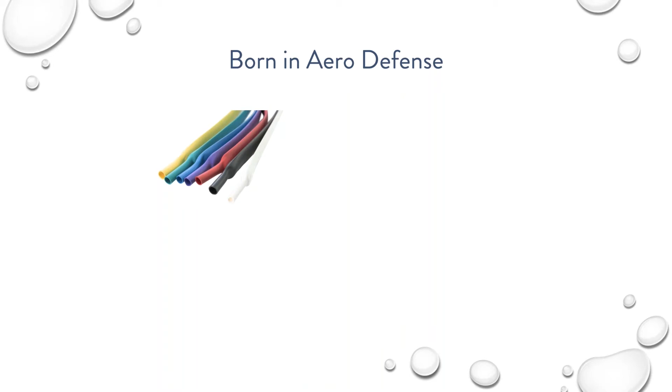We kind of started in the world of aero defense, and we like to say we were born in the world of aero defense, which really means heat shrink. We came into heat shrink, and we still do a lot of it. We've worked with companies including Bell Helicopter, Boeing, Lockheed Martin, and we still continue to work with these companies. We still work a lot in the heat shrink market, and it's been a very successful venture for us.

But in recent years, even though we started in the heat shrink world, we've actually become known as the cold shrink guys, and that's not a title we're offended by. We actually really enjoy it. It's kind of a funny story of how we got there, but ever since becoming more known as the cold shrink guys, we ventured into other weatherproofing products.

You can see a number of our most popular products here. Our whole goal with our weatherproofing product line is to produce weatherproofing products that save you time and money. What we want to talk about today is, I know weatherproofing is a major issue for anyone who works in telecom, WISP markets, etc. Anyone dealing with RF out in the elements, weatherproofing is a big problem.

The thing we really want to hit on today, because we work with the large carriers and provide a lot of weatherproofing for them, is to help you understand what their mindset is about weatherproofing, how they approach it and why, and how that's informed some of our product line. This requires telling a part of our history.

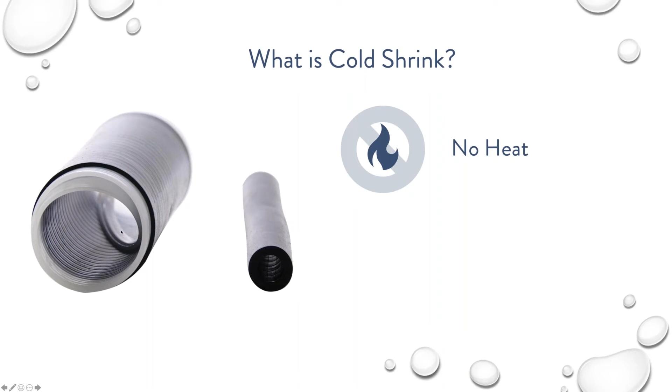If you're not familiar with cold shrink, literally it shrinks from one larger size to a much smaller size, as you can see here. Cold shrink is a really great product - it requires no heat to shrink. You just remove this inner plastic perforated tubing, pull this ripcord, and the perforation quickly removes, requiring no heat to shrink.

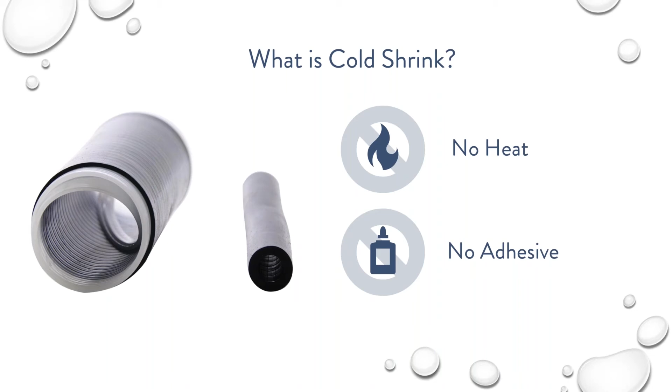It also has no adhesive, which can be highly advantageous for a number of reasons when it comes to weatherproofing. Cold shrink is a really awesome product, and AT&T liked the idea of cold shrink, but they weren't exactly happy with the version they had at the time, which was an EPDM model, and it just wasn't watertight enough for them. So they came to us and said, what can we do? We like the idea - what can happen here?

So we sat down and figured it out - it's a long story of how we got there, but essentially it came down to us figuring out how to make silicone cold shrink. This silicone cold shrink solved a lot of the problems that AT&T was having.

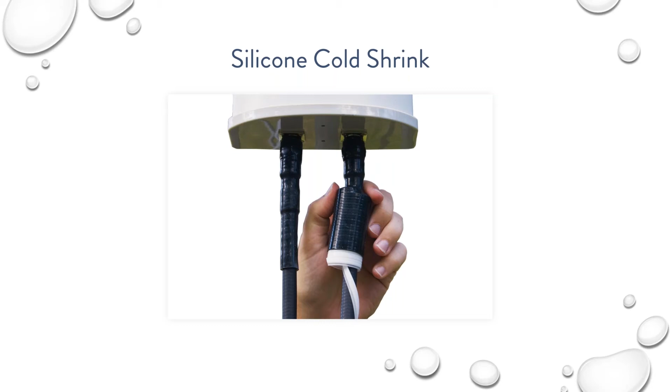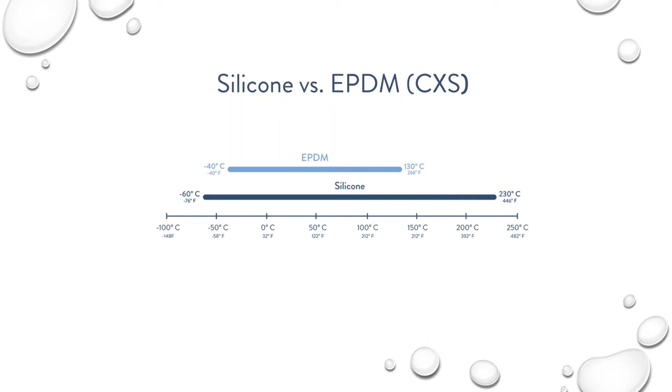Namely, if we compare silicone to EPDM cold shrink, one of the biggest differences between the two is EPDM cold shrink just doesn't have as large of a temperature range that it's resistant to. Whereas silicone cold shrink is pretty extreme in the temperatures it will withstand - you can see here, -60 Celsius or -76 Fahrenheit, up to 446 Fahrenheit or 230 Celsius. It's pretty remarkable what it can withstand temperature-wise.

However, the even larger reason that AT&T was very keen on this silicone cold shrink was because of the shrink ratio.

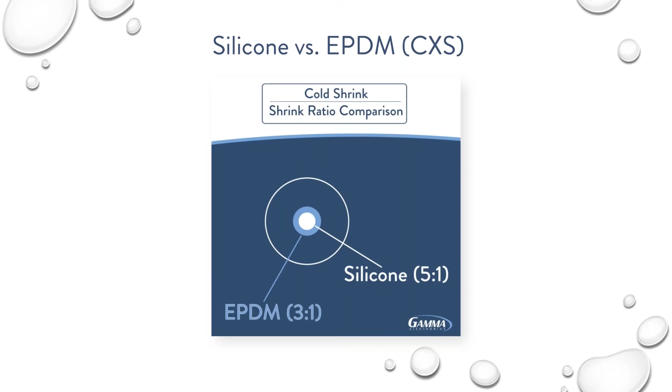This is a quick video that shows the difference between EPDM and silicone's shrink ratios. The EPDM is a 3-to-1, where the silicone can go up to 5-to-1. If this white circle is where both cold shrinks started, the EPDM only gets down to a certain size, whereas the silicone gets down to a much smaller size. Even though it may not seem like a large difference, when you're shrinking down to something the size of a cable, it makes a world of difference.

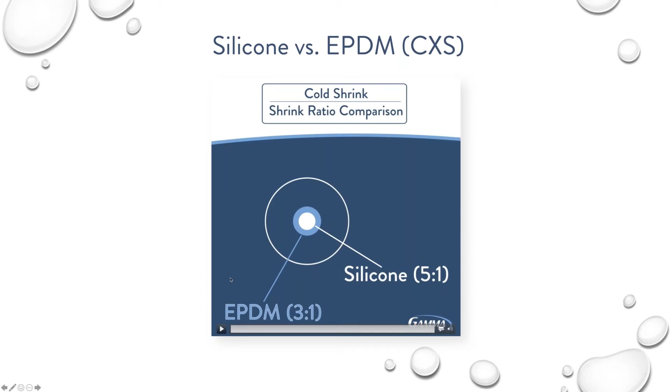That's the reason EPDM cold shrinks often come with a foam strip. They can't shrink quite small enough to get a tight wrap around a cable or connection, so they provide this foam strip to make up the difference. With silicone, you don't need that. It's going to get small enough that you won't have those problems. It'll be watertight on its own, removing an additional step that comes with EPDM. Plus, the foam strip just isn't going to be as resistant to water as a rubber material would be.

Silicone specifically is going to be incredibly resistant, more so than EPDM. Unfortunately, EPDM can still be a great product, but there are a lot of companies out there who sometimes make it seem like they're selling silicone when they're really selling EPDM. So one thing to know is that you want to be sure which one you're buying.

With our silicone, we put an S in the part number, S for silicone. On top of that, if you look for the more shiny, glossy version of cold shrink, you're usually getting silicone. With EPDM, it's going to have a flatter, matted look. That's a key way to tell the difference between the two, and it means the silicone is going to get that better shrink ratio and better temperature resistance, among other things.

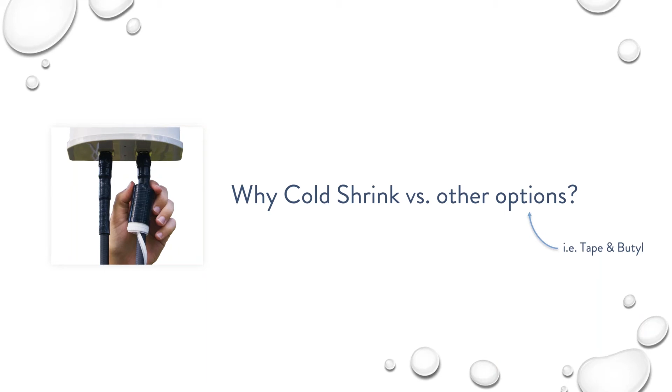And specifically, they were using a lot of tape and butyl at the time. So we asked why they wanted cold shrink versus tape and butyl, and we hypothesized the reasons. One of the top reasons we thought of was installation time. As you saw in the video, we're very proud of how quickly you can install cold shrink.

It's pretty amazing stuff. We started putting numbers together and realized this installs in seconds, less than a minute for sure. And they've got to love that.

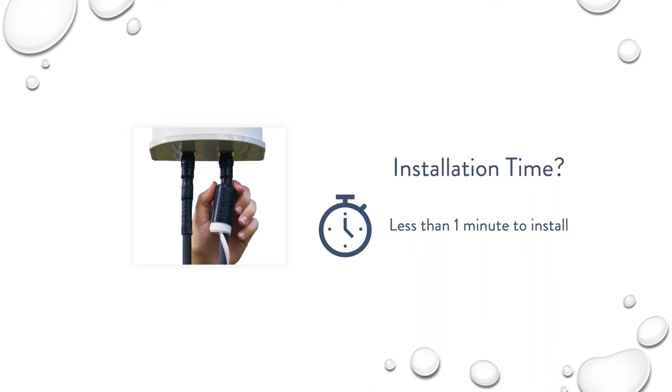We did the numbers and found that in typical telecom tower installations, when a brand new tower is going up, a lot of the time they're using 50, sometimes up to 70 cables, which means 100 connections. So if we do the math, if cold shrink took 1 minute, which it doesn't, but if it did, and you had to do 100 different connections, you're talking 100 minutes, or a little more than an hour and a half.

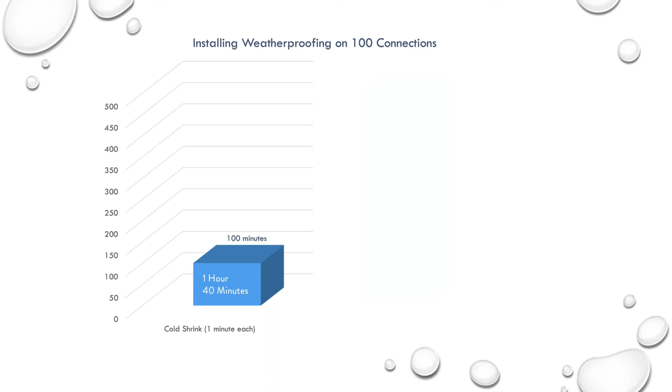Compare that to tape and butyl. At best, numerous installers have told us you're looking at 5 minutes, when it's at its best. That's a difference of 100 minutes to 500 minutes when you're looking at 100 different connections.

Especially if they can't get their fingers in around the spacing around those connections, there's so many issues with installing it. So you're talking the difference between an 8-hour day and at most a 2-hour day. And 2 hours is on the heavy side.

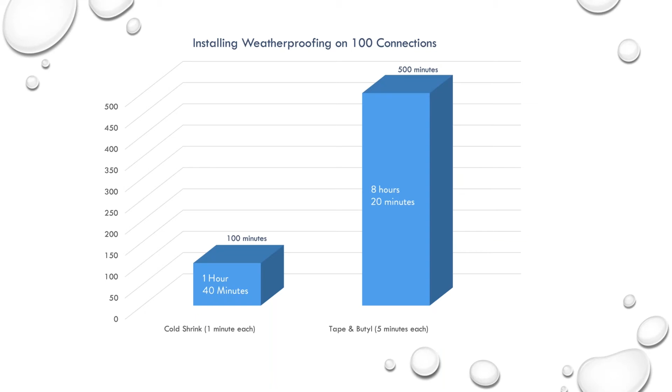If you look at the numbers in greater perspective, cold shrink at its worst, you're looking at an hour to an hour 40 minutes. Tape and butyl at its best is a full day's worth of work.

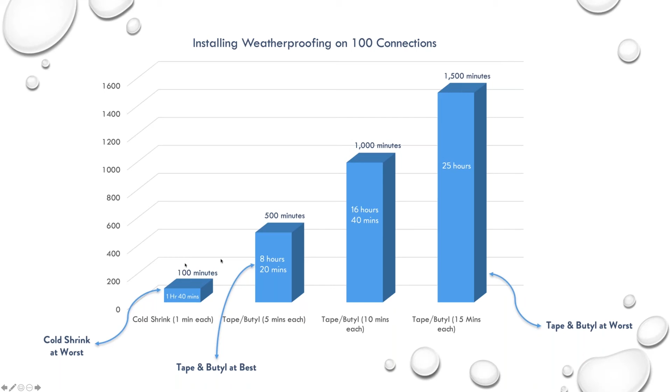If tape and butyl, which tends to take more around the 10-minute mark for most of the guys we've talked to, when we've tried it ourselves, it tends to take around 5 to 10 minutes in that range. But we've heard some guys say at its worst, in harsh environments, it can take up to 15 minutes, which means you're saving an immense amount of time by going to cold shrink. So literally days worth of work can be compacted down to a couple of hours by using cold shrink. We thought installation time's got to be the reason.

But again, that was not the primary reason AT&T chose cold shrink. That was not the reason they said mattered most to them.

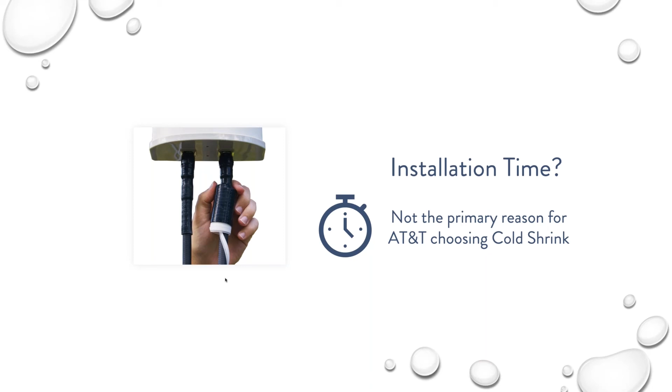So then we thought, as Lisa mentioned earlier, accessibility. We thought it must be the small amount of space you have between these connections, and tape and butyl isn't going to fit into those spaces very well. You can see less than an inch here. And as any of you who have installed know, getting up on a tower with those cables on those connections, wrapping tape and butyl around it, it's just a nightmare. So we thought accessibility must be one of the main reasons.

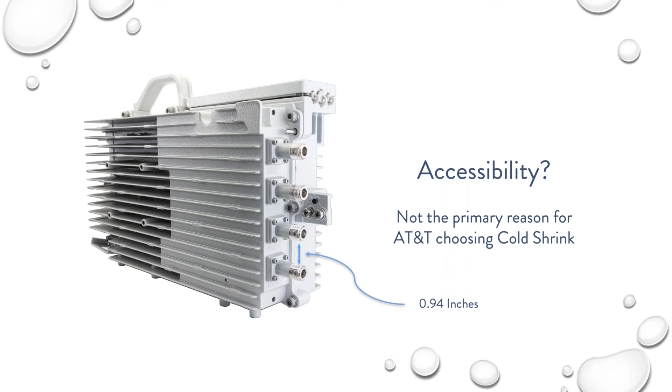No, again, not the primary reason they like cold shrink.

One thing they did tell us that we didn't think of right off the bat was installer quality control. By this, I mean you can have a brand new installer and a very experienced installer get essentially the same results with cold shrink. They told us that, and we thought, oh, that makes a lot of sense. But again, not the primary reason they chose cold shrink.

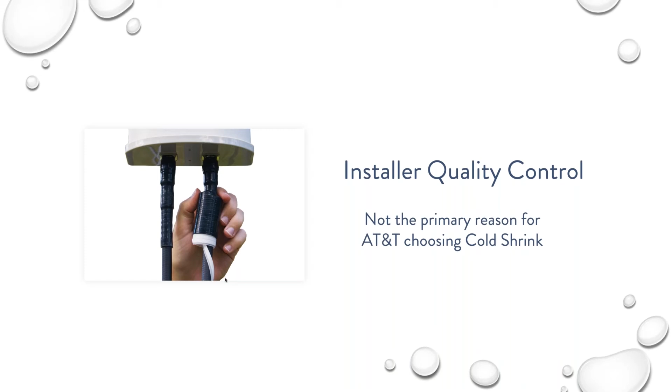So we essentially were thinking everything they must love about cold shrink is about the installation process. But really what it boiled down to for AT&T was maintenance. That's what they care about more than anything. And when we started wrapping our heads around that, it makes a ton of sense. Maintenance means time and money.

If you think about it, it makes a ton of sense that they can plan the costs of a tower. They can plan how much time it'll take to build, how much the materials will cost, all of it. But maintenance is much less predictable, and so they wanted to reduce those unknown costs. They want to bring that cost down and help their bottom line.

A study was done recently that said maintenance costs are approximately 49% of operational costs for major carriers deploying 4G. I mean, half of your operational costs can be devoted to your maintenance. And with that said, AT&T informed us one of the top reasons for maintenance costs is bad weatherproofing.

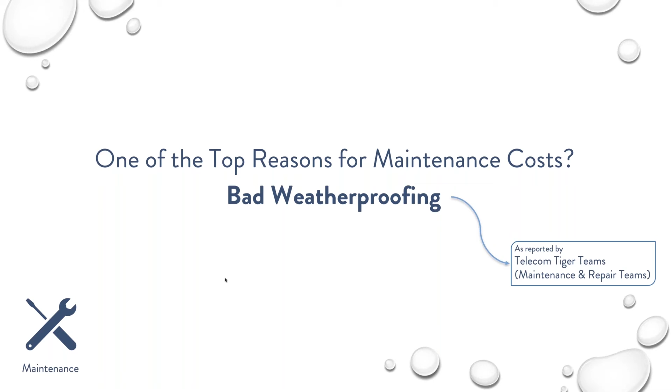Tiger teams have told us this too. Telecom Tiger teams are the teams sent out by telecom companies to do maintenance on the towers. They've all told us bad weatherproofing is one of, if not the main reason for maintenance costs. They estimated at least 30%, maybe as much as a third, of maintenance calls are due to weather-related issues. That brought up the question: what's wrong with the weatherproofing that's resulting in this much maintenance and maintenance costs?

It's an oversimplification, but either the weatherproofing just doesn't work or it doesn't last. We can go back to the original example of EPDM cold shrink. It kind of works in theory, but you have to use the foam strip. We've talked to guys who told us they actually zip tie the ends of it to make sure it gets a watertight seal. So you're using foam strips and/or zip ties, and it just doesn't provide the results you want because of the shrink ratio issues in particular. It's good in theory, but it doesn't produce the results.

And in regards to extreme temperatures, like in Canada, maintenance is what we hear twice a year, they have to go out and do weatherproofing. That's a good example. We recently spoke to an installer in Canada who said that twice a year he's having to swap out his tape and butyl. So it just doesn't work.

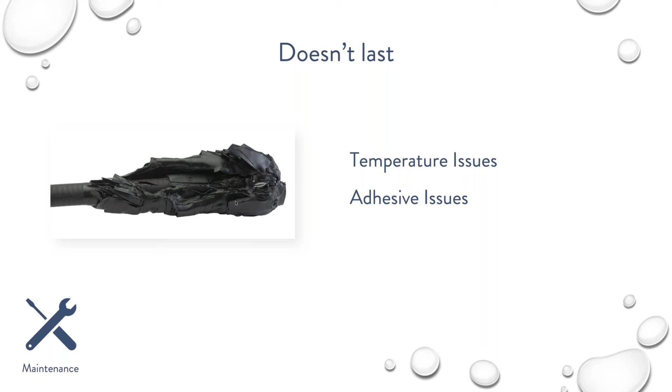Temperature issues mean the adhesive of the tape will stop sticking, which means you see it start to unravel, which means you have to replace it because it defeats the entire point. Water's going to seep in. There's just so many issues, and silicone cold shrink solves them.

And that's what we're most proud of. From AT&T and others, we've had no reported failures, zero, about our cold shrink. They put it up, and it works. It just works, and it's awesome. No one's ever come back.

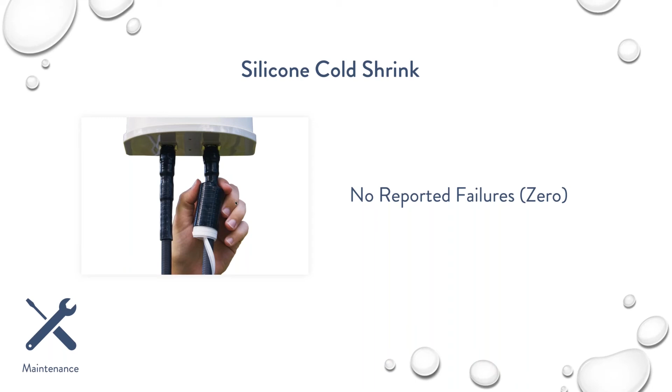So why does AT&T use cold shrink? Well, to reduce their maintenance costs, and it's been a huge savings for them over time. This is the whole thing we'd like to drive home today: if there's anything you take away from this webinar, it's to approach weatherproofing with maintenance in mind. Don't make the mistake we made where we went to AT&T thinking this was all about installation costs, about saving time and money on the installation side. No, this is all about maintenance. If you approach it with maintenance in mind, the long-term savings far outweigh what you save on the installation side. So think about the long-term savings that come with weatherproofing.

So that informed our mindset about weatherproofing and our goals for developing our weatherproofing products. We want it to be as maintenance-free as possible; that's our entire goal with this stuff. And there are some sub-goals underneath that. Obviously, to make it as maintenance-free as possible, it needs to provide incredible protection. That's why we've switched a lot of our products over, or when we develop new products, we like using silicone because it's so incredible in weather. But it has to last, and again, silicone lends itself to that.

We want our products to be fast and easy to use. Those are our three objectives when developing products: it's got to be easy, it's got to last, and it's got to protect against weather. Cold shrink nails it—incredible weather protection, it lasts, we guarantee it to last the lifetime of the cable, and it's a fast and easy install, as we saw in the video. AT&T fell in love with it, and we love it too. It's become very popular in the industry, and we developed a tagline based around cold shrink: our products install in seconds and last a lifetime, often meaning the lifetime of the cable. Cold shrink has been a huge success for us.

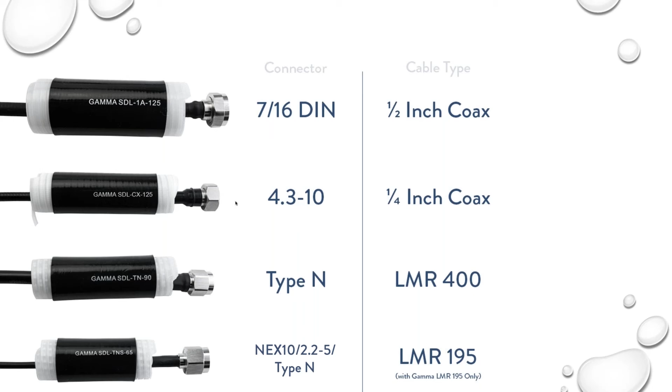So, RF weatherproofing. We know cold shrink is a great product, but we don't have a one-size-fits-all solution. There are different scenarios where you might need different options. So the first thing we did is branch out with the cold shrink we offer. We offer it in different sizes, tested and perfectly matched to these connections and cables, and we're often testing them on new things to make sure they work.

When we test them, we don't just spray water at them—we drop them into a water tank overnight sometimes. Usually at minimum we drop them in for 45 minutes, then bring it out and see if any water got inside. We can guarantee on these connections and cables, water did not get inside after dropping it in a tank. We're really proud of that.

One thing we're excited about is we just tested a couple different connections. If you're using NEX10s or 2.2-5s, we recently tested those and found that our TNS65 will work on those connections as well. We're really excited about that.

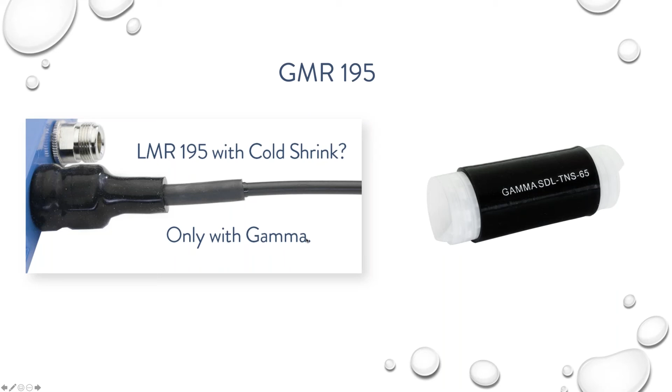We know in the WISP market that LMR 195 is used quite often. We felt it tested pretty well, but we wanted to make it absolute, so we developed our own LMR 195 cable that we call GMR 195. Since we started in the world of heat shrink, we took an LMR 195 and built it up on the end with a very thick outer diameter heat shrink, so the cold shrink grabs very tight to that cable. Cold shrink has an incredible shrink ratio, but it can only shrink so far, and we wanted to guarantee the results with an LMR 195. That's why we developed this entire product—the cable that comes with the cold shrink—to guarantee those results. That's the GMR 195, if you want to use 195s with cold shrink.

We also offer our cold shrink in different colors. We've had numerous people say they want to color code—a lot of guys use tape to color code cables, and they can skip that step by color coding with the cold shrink itself. That's one of the reasons we went with that.

But that's cold shrink. In terms of RF weatherproofing beyond cold shrink, we looked at other options that might be applicable in different situations. So we have cold shrink, but we also refer to these as our big three, and often our big four with our magic tape: the slide lock, weatherproof boot, and the magic tape.

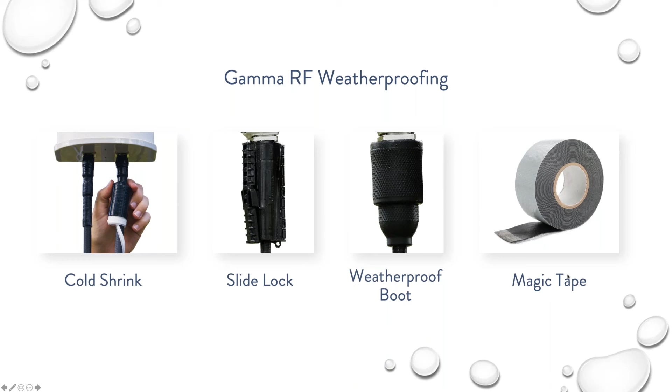So these all kind of meet our goals that we mentioned with cold shrink. We want them all to have these same traits, and we feel they all do. With that said, I want to talk briefly about each of them and why you might use one versus another. So the slide lock, for example, is great.

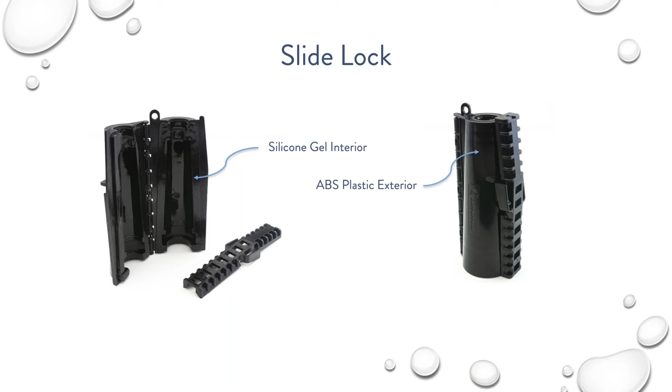This was actually developed in conjunction with AT&T. They asked us to develop this. It has a silicone gel interior, and we already talked about the incredible traits of silicone. It also has a plastic exterior, which helps protect against the elements while making sure you have a nice secure interior.

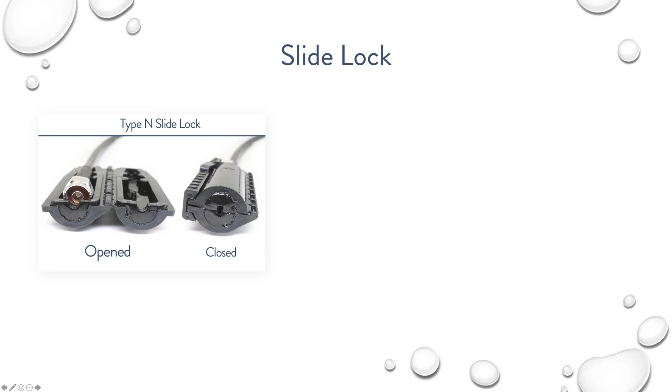It has this little sliding mechanism. You take the slide lock, wrap it around the cable, then slide the locking mechanism into place, and it installs in seconds. When it does, the connection stays inside, and as it closes, the silicone gel wraps itself around that connection and makes it incredibly secure. In fact, when we developed the product, AT&T specifically told us they wanted to see the gel come out around the connection, so we developed it with lots of gel inside to make sure it's popping out the top, so you can see it whenever you're installing and confirm a secure connection.

One of the main reasons, beyond its incredible weatherproofing properties, to use the slide lock is that it's reusable. There are some limitations, to be honest. If you use the slide lock as a permanent solution and leave it up there for years, the gel inside is probably going to take a shape and not be easy to reuse outside of that form. But if you go up a few months later and want to pop it off, pop a new cable in, and pop the slide lock back on, that's probably going to be fine. So if you're worried about swapping out the cable in the next few months, this is a great time to look at using the slide lock.

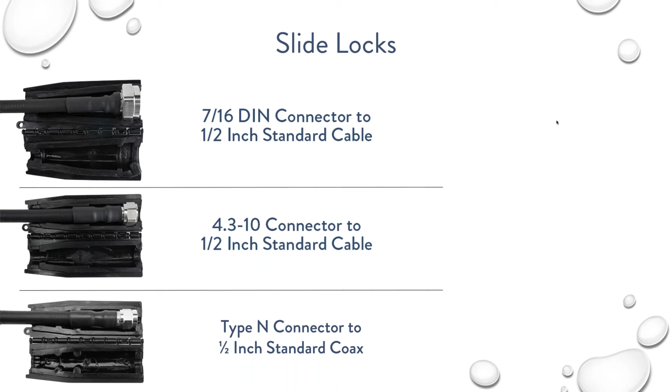So again, AT&T approved, very popular product for us. It's been great, especially if you're thinking you might need to reuse it. The only limitation on slide locks is that it's not as available in as many sizes. It is available in numerous sizes, as you can see here, but not as many as Cold Shrink and some of our other products. So that's the Gamma slide lock.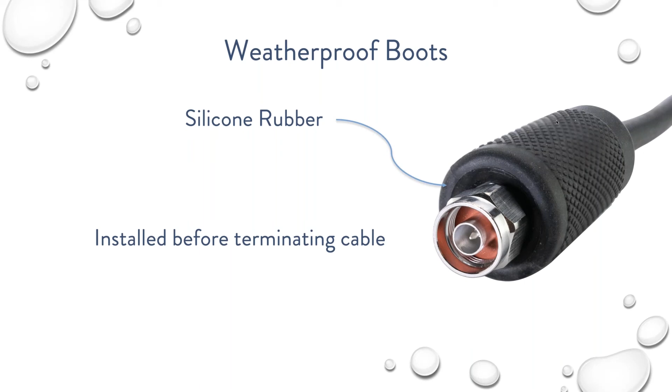So with that said, here's a very quick video of the weatherproof boots.

Now, as you've probably already figured out, the big thing with the weatherproof boots is how quickly they slide on, but also how quickly they can slide off. So they're a fantastic option if you need to get back into the connection. The slide-on weatherproof boots have become very popular, and we have them in a number of sizes. But this is probably the product we get the most questions about—like, does it really work?

It just looks like this rubber sleeve essentially that's going around it. And the thing we like to point out is it's deceptively simple. There's actually quite a bit of technology packed into these boots. You see these little ridges here making sure the water is staying out, but also making sure these are perfectly sized to the different cables and connections so that they really are watertight.

You may have heard it in the video where you hear that popping sound. That's the air pressure coming out of these boots. It's so tight that you hear and feel it when you install it, the air pressure inside the boot. So there's a lot of technology packed into these things, they're just deceptively simple. On the back end, you get these same ridges, but you also get this watertight seal on both the connector and cable side of the boot.

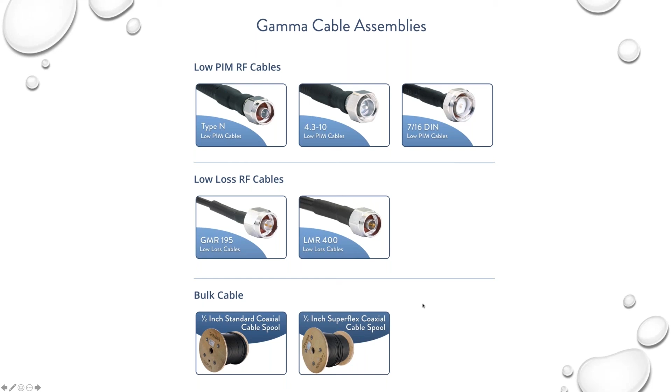And then you can buy bulk cable from us if you want to make your own as well. So the main reason for us doing this, like I said, was weatherproof boots. We want to be able to get our boots on the cable for you easily, and we can guarantee the results right out of the factory. That's why we started pairing these up.

The cool thing is we're able to provide savings to you when we do this. So essentially, if you purchased a low PIM cable, for example, and you purchased all the elements separately from one another, the cable might be 50 bucks, which is a great price for a low PIM cable actually. But you buy cold shrink times 2, you're looking at another 30 bucks—$32 there, and that's our largest version of cold shrink and most expensive. That brings you to a total of $82.

Now, what we did is we took all those things and put them together in one kit. If you purchase it all together, you're looking at cable and cold shrink for $70, and it's just one SKU—you don't have to go and order each part separately. You buy one thing, you get all three packaged together, and you're saving yourself a lot of money in the long run. Getting a low PIM cable for $70 is often a bargain. Getting it with weatherproofing is almost unthinkable.

And so we really try to provide the value here, and it's something that you should definitely look at. If you're looking at cables, you want to get it with weatherproofing, obviously, and this is a great way for you to go. But on top of that, you can also make sure you're choosing what you want.

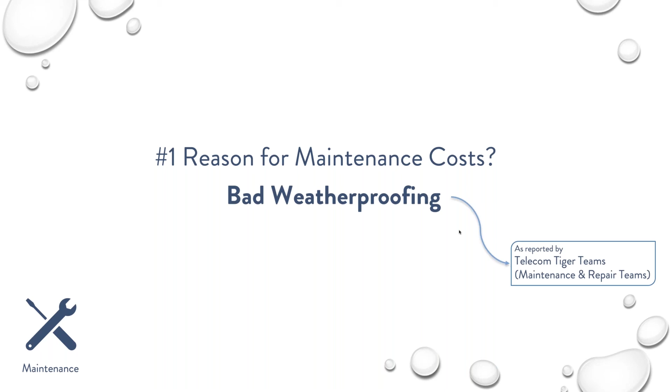And just to wrap up things here, in conclusion, one of the top reasons for maintenance costs is bad weatherproofing. So make sure you're approaching your weatherproofing with maintenance in mind to reduce your overall costs. If your operational costs are 50% of what you're doing, and the majority of that is going to weather-related issues, a little more investment on the weatherproofing side is going to save you a lot of money in the long run. So reduce your maintenance costs by choosing the best weatherproofing out there, which we feel we genuinely are.